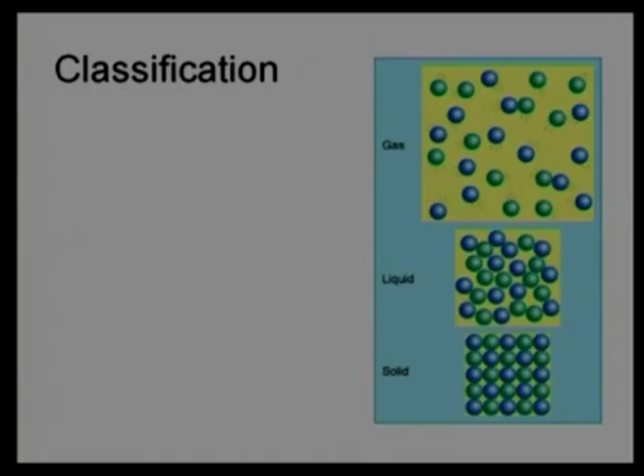Based on this molecular structure, we can divide lubricant into gaseous lubricant, liquid lubricant, and solid lubricant. In addition, we have one more classification called semi lubricant or semi-solid lubricants, where they have a state in between liquid and solid. They have flowability, but they show some initial resistance. So lubricant can be classified as gaseous lubricants, liquid lubricants, semi-solid lubricant and solid lubricant. Every lubricant has its own characteristics.

They are preferred in different situations. Maybe gaseous lubricant, which has very low viscosity and a lot of gap between the molecules, will give very low resistance against flow. In that case, the coefficient of friction will be very low, but because of their molecular structure, they are not able to sustain much load. That means this kind of lubricant can be used only for very low load applications.

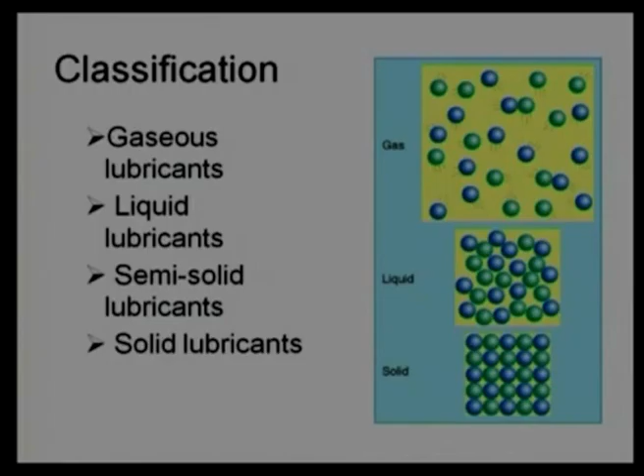While a solid lubricant can stick and sustain a huge amount of load, they will not get squeezed out. So they have more application when the load is very high. In extreme cases of load and speed, we need to choose a proper lubricant. But before that, let us see what is the importance of lubrication.

It has been realized in one way or another that lubricants are very important. We have a table picked up from the wear control handbook, with reference given there, which shows a comparison between hydrodynamic lubrication and squeeze film lubrication - we will explore squeeze film lubrication in our next module - elastohydrodynamic lubrication, boundary lubrication, solid lubricant, and unlubricated.

Unlubricated does not mean that it is not lubricated at all. There is a possibility of natural oxides on the surface, but we are emphasizing that we are not doing anything intentionally - no lubricant has been intentionally supplied or applied on the interface.

So when we compare wear rate between the unlubricated case and solid lubricated case, what do we get? Almost a difference of 100. If wear rate is 100 units for the unlubricated case, we may reduce this wear with the solid lubricant to 1% of that - a huge difference. Obviously, component life can be increased by 100 times by properly choosing the solid lubricant.

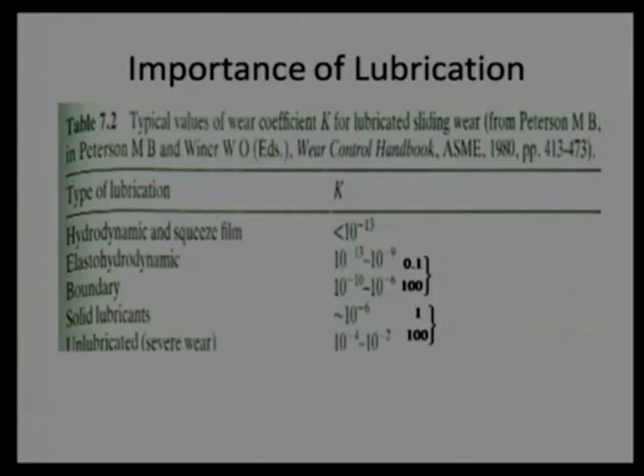So, we can use solid lubricant as a boundary lubricant, we can use a carrier fluid with a solid lubricant, and one of the most commonly used solid lubricants is molybdenum disulfide. It has been mixed with lubricants and greases, so that grease and liquid lubricant act as a carrier fluid, and wherever a lubricant film is required, the solid lubricant or molybdenum disulfide occupies that space.

Now, before starting the lubricant classification, it is important to understand how to define liquid lubricant, solid lubricant or any kind of lubricant. Many times when we drive a car on a sandy road, we find the car slipping; the coefficient of friction is very low. I can say the sand is acting as a lubricant, or sometimes the surface is uneven, lesser area of contact, lesser friction. We can say the gravels are also acting as a lubricant, but that is not the case when we understand the science of lubrication.

We say lubricant can be defined based on the properties. A lubricant needs to provide low, but constant and controllable friction. It is not like sometimes the lubricant provides 0.1 coefficient of friction, sometimes 0.5, 0.6, uncontrollable. That most commonly happens with sand or gravels. The coefficient of friction continuously changes. It is lower than a solid road, but uncontrolled. So, from that angle, gravels or sand cannot be called a lubricant.

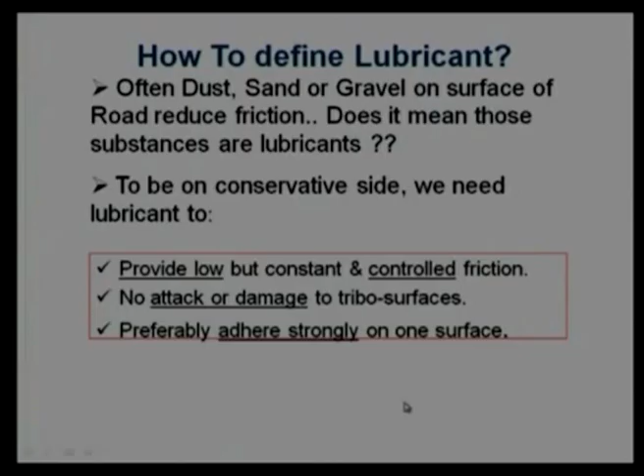So, first, it should provide a controllable coefficient of friction. Second, it should not damage the surface. And finally, it should not need to be provided again and again; there is a possibility of some temporary lack of lubricant, so we require stickiness to the surface also. It should not happen that momentarily we are unable to supply lubricant and then the system fails. In that situation, the lubricant should have some adhesiveness with the surface. So, lubricant can be defined based on this: low and controllable coefficient of friction, no damage to the surface, and preferably attachment to the surface.

Now, we classify lubricants as solid lubricants, semi-solid lubricants, liquid lubricants and gaseous lubricants. All these are very big groups. We will not be covering everything in detail, but to some extent we will learn the classification. The remainder of this lecture will be understanding the classification of solid lubricants.

Solid lubricants are basically materials in the solid state which show a low coefficient of friction or low shear strength. A solid lubricant is any solid material which can be placed between tribopair surfaces and can be sheared more easily under a given load condition than the tribo materials themselves. That means a third substance is used between the two materials of a tribopair, and it should be easily sheared.

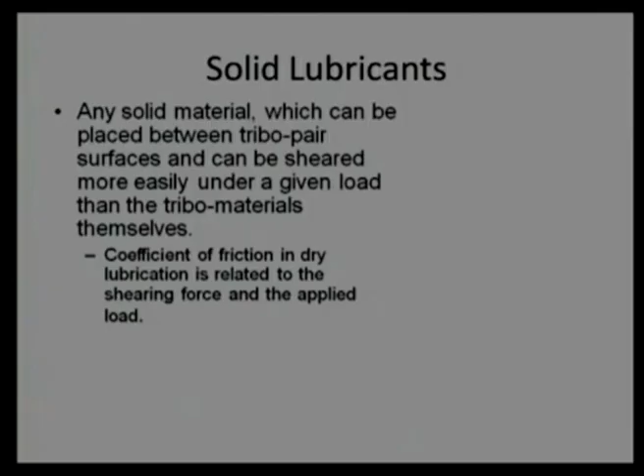Now, if I go back to our original Stribeck curve, we defined boundary lubrication there. It is interesting to note that solid lubrication can be defined in a similar state. It follows more or less dry friction laws, only the magnitude is decreased. The coefficient of friction in solid lubricants can be related to shear force and applied load. Coulomb's law can be used for these lubricants, because they are dry, not liquefied, and do not flow to a major extent, and based on the Archard equation we can define the wear rate.

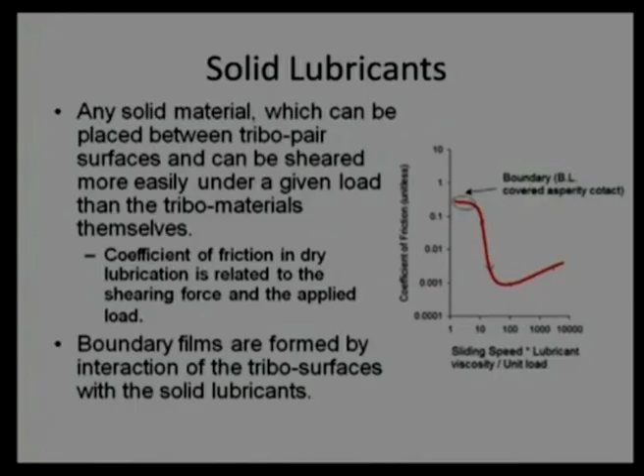Now, you say that boundary films are formed by interaction of the tribo surface with the solid lubricant. In the presence of solid lubricant there will be some mechanical rubbing, because tribology is defined based on the mechanical rubbing. There is a possibility of a film of solid lubricant getting transferred to the materials in contact. By and large, that is the mechanism by which it works.

Before starting solid lubricants, we want to explore what are the advantages and disadvantages. When should we recommend solid lubricants? The first point is they are more effective than fluid lubricants. Fluid may be liquid lubricant, gaseous lubricant, and grease also has flowability. So, I can define grease also as a fluid. So, all three: liquid, gases and semi-solid.

Solid lubricants are more effective than those lubricants, particularly in high load conditions. Whenever the load is very high, lubricant will try to get squeezed out from the interface, and a solid lubricant which has more bonding strength with the surface will remain in contact. They will be more effective compared to liquid lubricant, gaseous lubricant, and semi-solid lubricant also.

The second advantage mentioned here is high resistance to deterioration. They do not get deteriorated, they do not get easily oxidized in storage in a common space. They have relatively high temperature stability, unless a vacuum is created where they degas; they will try to vaporize.

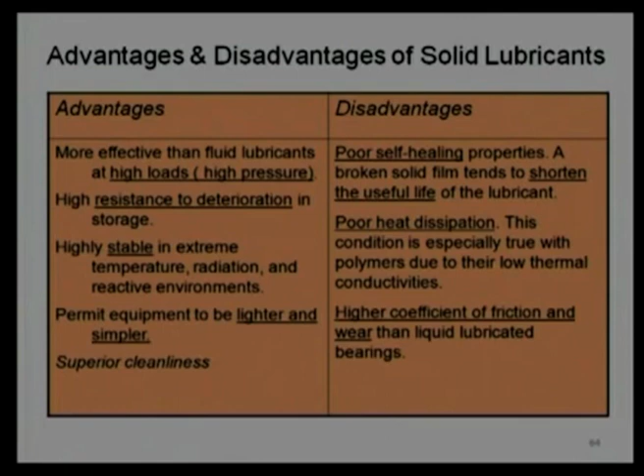So, first the wear rate of the solid lubricant and subsequently the wear rate of the metal at the interface will be high, and of course the coefficient of friction will be high because they have a high bonding strength with the interface, and they do not give a very low coefficient of friction or low shear strength. Because of the solid state, they will have a higher shear strength compared to a liquid interface.

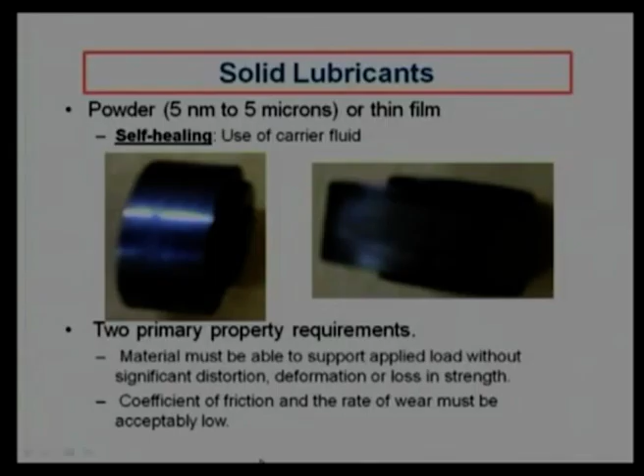Second, we need to choose a solid lubricant as per the desirable coefficient of friction. Some solid lubricants show a coefficient of friction of 0.05, some 0.1, some 0.2, some 0.3. So it depends on the condition and what coefficient of friction is desired. Similarly, the rate of wear should be acceptably low. If we are designing a component for very high life, wear will increase the clearance, and that may reduce the overall service life or operating life of the component.

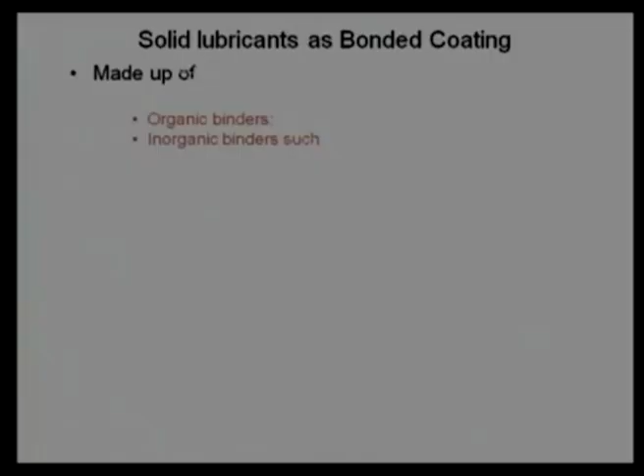Now, I mentioned one way to apply a solid lubricant on materials coming into contact, like a cam. But there is another way: we use solid lubricant as a bonded coating. That means they have some binding agents, and with those we apply the solid lubricant. There are a number of binding agents, but we can classify them as organic and inorganic binders. Organic binders generally have a temperature limit. They are particularly resins with sticky behavior, and they lose their behavior at temperatures above 300 degrees centigrade.

That is why this kind of solid lubricant coating should be used when the maximum operating temperature is less than 300 degrees centigrade. Otherwise, at high temperature they will start liquefying and flowing, and the solid lubricant will not stick and will not remain effective. But if the operating temperature is less than 300 centigrade, we can use resin based binders to stick the solid lubricant to the components where desired.

Similarly, we have inorganic binders. Here metal composition comes into the picture; sometimes we use ceramics, or a mixture of all. They remain stable at higher temperatures, even up to 650 degrees centigrade, which is quite high for most tribo interfaces, and they are effective there. Of course, research is always on, and people make resin binders which can operate at 350 or 400 degrees centigrade, but that is from a research point of view, not a commercial one. What is mentioned here is the more common, available in the market.

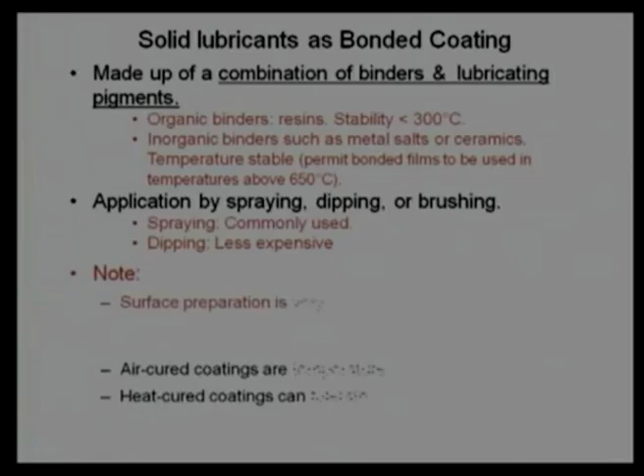Now, a few notes, a few conclusions based on what we have mentioned can be stated. To apply solid lubricant in coating form, we require good surface preparation. Some irregularity on the surface will help us easily deposit the solid lubricant on the surface. That is why most often we use emery paper to rub the surface, make a slightly irregular surface, and then apply solid lubricant on the surface. So, surface preparation is important.

Now, the utility of emery paper rubbing can be described in a number of ways. One is giving a slightly rough surface. Another is removing contamination from the surface. We know if there is contamination on the surface, then adhesiveness between the solid lubricant and the parent material will not be that much, because contaminations generally have low shear strength, and the bonding will be reduced. If we rub with emery paper, it is going to remove the contamination to some extent.

And of course, if we keep it for a number of hours after rubbing, the oxide layer will be formed again and it will not be effective. So, rubbing and immediately after that depositing the solid lubricant will help.

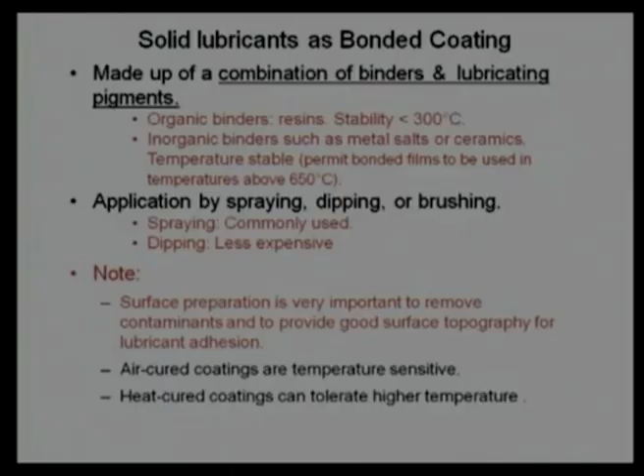Now, we can classify solid lubricants based on their molecular structure. The easiest one is polymers; they have lesser chemical reactivity, but they have a low melting temperature. Then we have metals in solid form. We are using the word solid because we know very well metals also can be used as a liquid lubricant, when the operating temperature is very high and the metal really flows. So, we don't want to mix these together. In this case we are particularly using metal in solid form.

And finally, we come to cermets. Cermets are generally a mixture of ceramics and metals. Metals are used as the binders for a ceramic material, and we know ceramic materials have a very high melting temperature, and this kind of composition can be used for high temperature applications.

We have seen a number of applications of solid lubricants, such as bushes. In washing machines or juicer mixers, we find polymer bushings that act as solid lubricants. They serve a dual purpose: they support the rotating shaft and also act as a lubricant, both functions combined.

We have also seen solid lubricants used as separators in rolling element bearings. These bearings have an inner ring, outer ring, and a separator along with rolling elements. If we do not use a separator, all the rolling elements can club together at one place, showing high load carrying capacity at 180 degrees but none for the remaining 180 degrees. So we require proper controlled load carrying capacity and controlled friction, which is why we use cages or separators.

That is why we write that this kind of solid lubricant can be used with the cages. It can be a complete polymer-based one, or some sort of bronze-based cage with a solid lubricant coating applied on it.

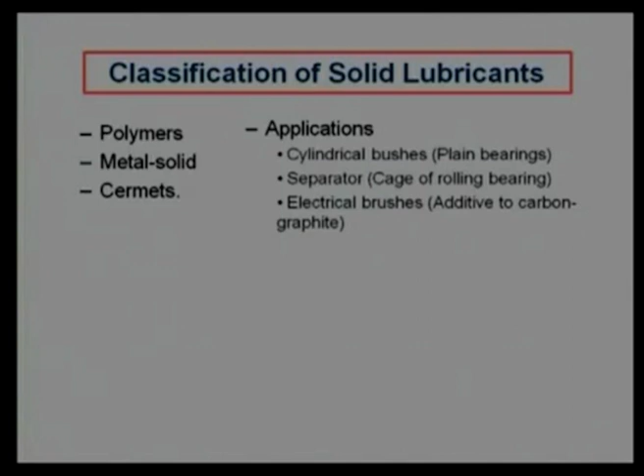Now, what is the advantage of this kind of ring? The advantage is the huge number of applications. This seal is used to stop steam leakage, and steam itself is a high temperature fluid, saturated steam at 120, 130, 150 degrees centigrade. So we require a seal which also gets self-lubricated.

When we talk about self-lubrication, the question naturally comes whether they have a solid lubricant along with other composition. In this case it is a mix with antimony, carbon graphite mixed with antimony. Carbon graphite is used as the solid lubricant, while antimony is used to increase conductivity and to increase impact resistance.

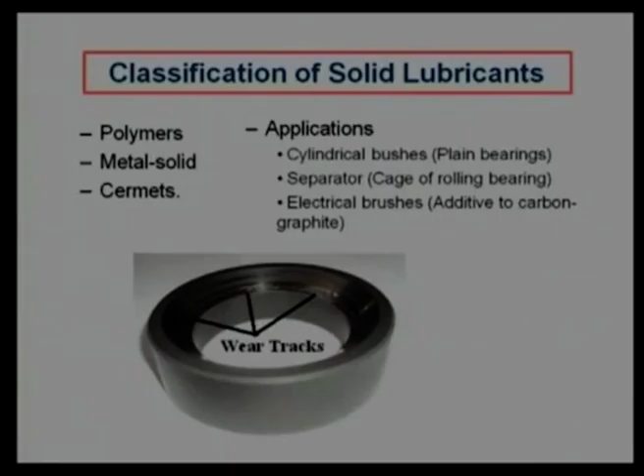One way is that you push it with a spring. So wherever there is wear, it gets pushed with a helical spring and regains its position. Even though it wears out and the thickness decreases, it keeps coming back to the same position.

If there is leakage of steam, then there is a loss of the fluid that we require to stop. Now, if the seal ring is getting worn out, there is a spring which pushes the shaft against it. If the thickness of the seal ring is reduced, because we have already used a pre-compressed spring, it will adjust the position of the seal ring.

So this means if we are using a solid lubricant as one block, there should be some arrangement which gives a self-healing property to the solid lubricant. Otherwise, it will be a failure.

Otherwise, if we do not use this kind of spring and just use a seal ring, after a couple of hours the seal ring will wear out, the intended function will not be fulfilled, and leakage will start. Within a couple of hours we would need to remove the seal ring and replace it with a new one, which would be very tedious, since opening and closing this kind of assembly itself takes a number of hours. So if the operating life of the seal ring is only a few hours, it has no meaning, and we should not be utilizing this kind of seal ring.

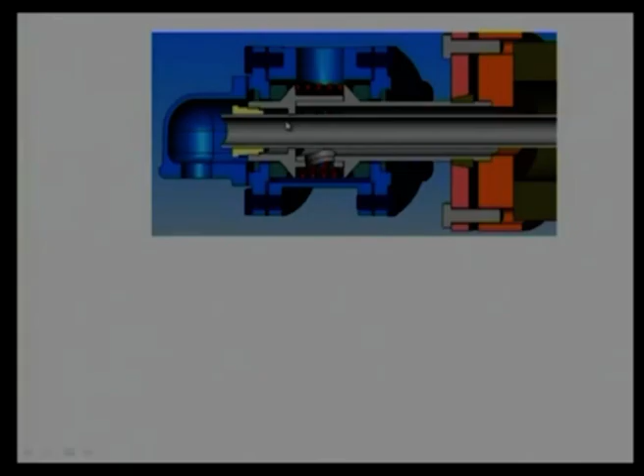That is why we use this kind of adjustment device, which gives overall favorable results to us.

Another mechanism is to use solid lubricant as a thin film coating on the surface. This thin film coating has advantages: it will not wear out very easily. It has been observed that with a decrease in thickness, their bonding strength increases significantly, so it will not shear out easily and can sustain much higher loads, and can sustain high fatigue loads as well with a thin film.

Depending on our application, we can use this kind of coating, but the only problem is that if there is wear, the intended function will be lost. We need to be very accurate, or be able to properly estimate when the wear will occur, and before that we should be ready to replace this kind of component. So that is one mechanism for using this kind of coating.

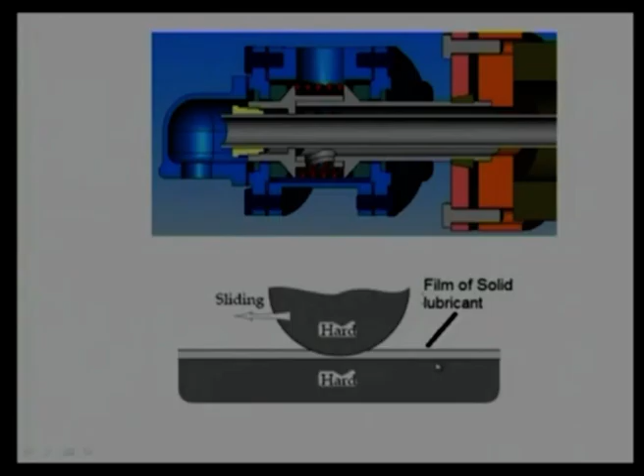Of course, we can also use a carrier fluid along with the solid lubricant when relying on this kind of coating.

One of the major groups of solid lubricants is polymers. We say that polymers are suitable to bear light loads. If you apply a load with a high magnitude, then...

They have a coefficient of friction, and we know coefficient of friction into normal load gives the friction force. If the friction force is very high, the rate of heat generation will be high. And they have poor heat dissipation, since their thermal conductivity is very low, so they will not be able to dissipate the heat.

There will be heat accumulation, which will increase the temperature of these components, and if the temperature increases, there is a possibility of plastic flow of these polymers, which will cause the loss of the intended function.

That is why we say polymers should be used only for light load applications, and sometimes we use polymers as binding agents.

PTFE is one of the well known concepts. It has been utilized in a number of utensils by DuPont company, which is one of the well known companies for PTFE, and they gave it the name Teflon.

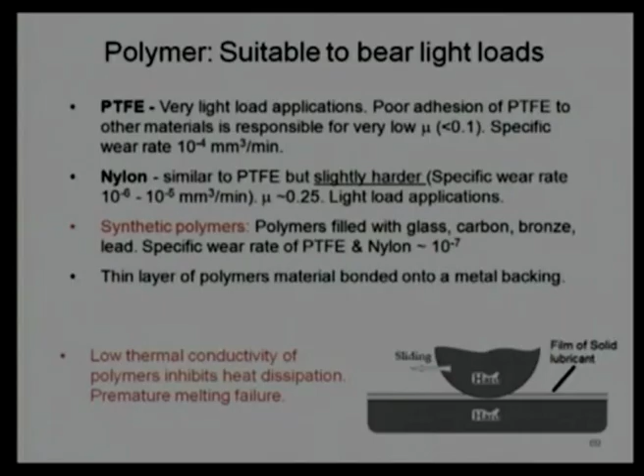As this slide clearly indicates, this name was given by DuPont as Teflon. They do not use the word PTFE, they use Teflon. That is the trade name given by this company. However, in this slide also we are trying to show the strengths and weaknesses of PTFE.

PTFE does not react easily with a number of substances, so it has more chemical stability. It remains in the same position, same structure, for a longer time without reacting or changing its structure. It changes structure under load condition or high temperature, but not in a chemical environment. It has been mentioned that they have more inertness. This is basically ethylene where all the hydrogen bonds were replaced by fluorine, which gives very high chemical affinity and chemical stability to the compound. They have low surface energy, which is why they show low coefficient of friction. They have low shear strength at the interface, and a low velocity is permitted along with low wear rate.

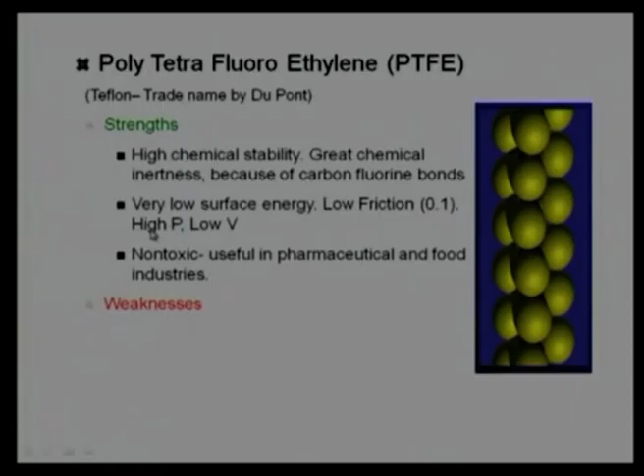This is a major advantage of PTFE. However, there are some weaknesses. As we say, it is soft, so the wear rate will be high, and to reduce the wear rate we need to do something with PTFE.

They have poor creep resistance. That is another reason why we use PTFE with a metal base, or with some support. They have poor creep resistance if they are used in bulk, but a few-molecule-thick layer or even a 0.5 mm thick layer will not show that bad creep resistance or creep behavior.

Thermal conductivity is low, which is why again we require hybridization with polymers, other fibers or metals which will increase thermal conductivity. Now, this is a final bad thing about PTFE: vacuum is detrimental. They start vaporizing, they start degassing the component. So that is why they are not effective particularly when used in vacuum situations. That is why we cannot use this kind of solid lubricant in extreme cases.

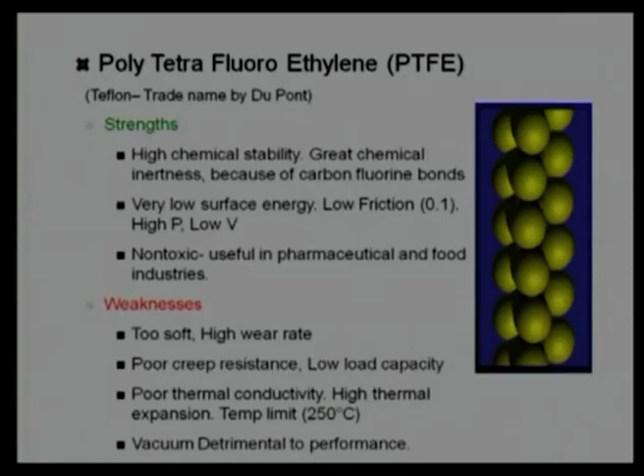Now, as I mentioned in the previous slide, advantages are very favorable, but there are disadvantages and we need to do something after learning what PTFE can do. Most of the disadvantages of PTFE can be overcome by using fillers to increase the strength, by impregnating with metals to increase the thermal conductivity, and by synthesizing these polymers.

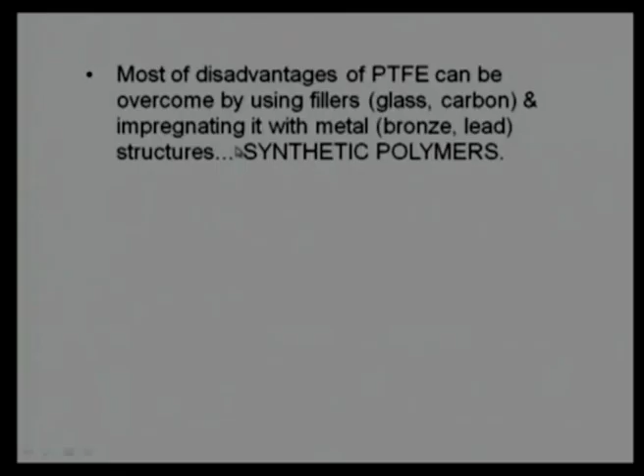It has also been mentioned here that with a suitable rigid backing, PTFE can reduce the wear rate and withstand high temperature or high load; the stress level can be even 100 megapascal, while still maintaining a low coefficient of friction. The coefficient of friction is consistent: the static and kinetic coefficients of friction are almost the same when using PTFE. That is a major advantage of PTFE.

If I talk about liquid lubricants, without sliding, without relative velocity, the coefficient of friction will be high. That means the static coefficient of friction may be as high as 0.25. Under dynamic conditions, when sliding has started and the hydrodynamic film is completely formed, the coefficient of friction reduces to 0.001. A huge difference between 0.25 and 0.001, which I am sure is going to give stick-slip phenomena, unless we support hydrodynamic action with some other action.

In the case of PTFE, they show the same static coefficient of friction and almost the same kinetic coefficient of friction; there is no variation. That is why we say it is almost free from stick-slip phenomena, and why PTFE can be utilized. Of course, PTFE alone cannot be utilized; it needs to be mixed with some fillers and needs some support, so that thermal conductivity is increased and resistance to compressive force increases.

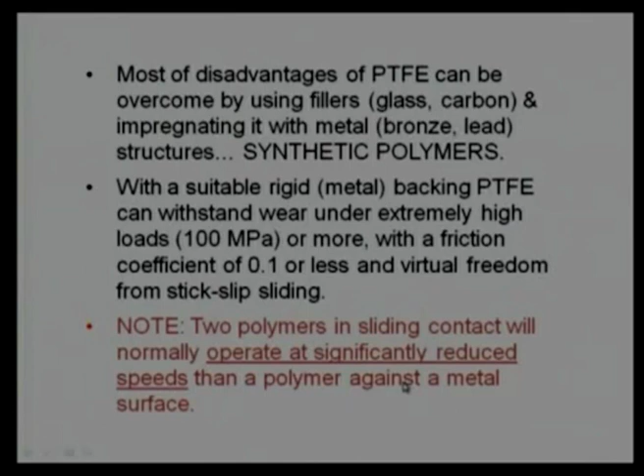That is why this note says that two polymers in sliding contact will normally operate at significantly lower speed than polymer against a metal surface. Metal has high thermal conductivity, and high sliding speed means high friction heat. High heat requires high dissipation, which metal has, but otherwise it does not have.

So this kind of polymer pairing is recommended under low speed conditions. When the sliding speed is very low, we can use two polymers; they turn out to be cheaper, may be non-toxic and can be utilized easily. But if the sliding speed is higher, maybe a few meters per second, one polymer should be used with a metal surface. If the sliding speed is almost negligible, we can utilize two polymers together.

We will continue with the classification of solid lubricants in our next lecture.